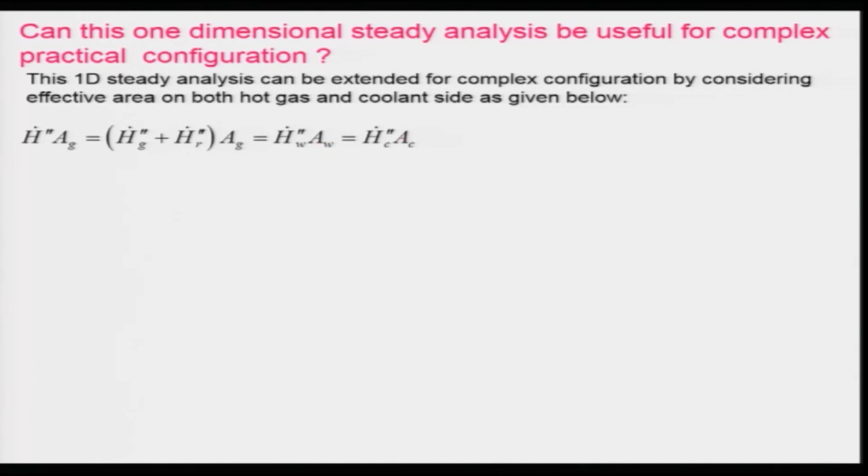So, what will we be considering? A g is the hot side area, and A w is the area of the wall. Of course, we will have to take the average area having certain thickness, and A c is your coolant area. So, A g is the hot gas side area, A w is the effective wall area, and A c is the effective coolant wall area, that we will have to consider.

And if we know this, then equation 8 becomes basically q dot double dash is equal to T wa minus T c plus q dot double dash R divided by h g, divided by the resistances. This is 1 by h g, delta L by k w into A g by A w, and A g divided by h c A c, and this we can call equation 9. And this you can derive yourself. I am just leaving it for you as an exercise.

In order to use this expression, we need to either know the heat flux, or we will have to know the other things on the right hand side. For example, T c we can sometimes fix for designing, and of course, the area has to be calculated, delta L can be chosen for design purposes, some thickness, or it is already designed. k w is the thermal conductivity of the wall, which we will have to find depending on its material. And h g and h c, the convective heat transfer coefficients, have to be known; then only you can find how much heat flux is passing through, or vice versa.

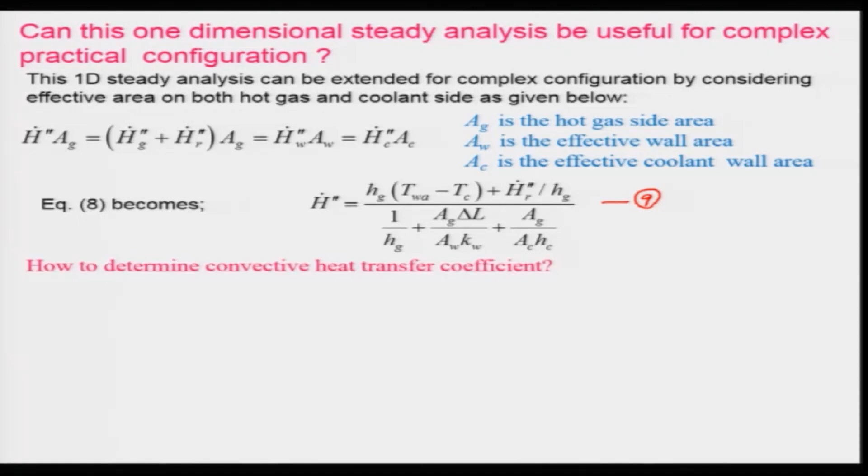If heat flux is known, then you can find what your T wa or T g will be, or something like that. So, therefore, the question arises how to determine the convective heat transfer coefficient.

For this, we will basically be using semi empirical expressions for Nusselt number, which people have already obtained by conducting experiments. However, if you want to do it analytically, you will have to solve all the governing equations for conjugate heat transfer and turbulent flow, or if you want to do it for one dimensional, of course one can do that, but you may not get a very accurate result.

Now, that can be done, as I told, by using semi empirical relations for convective heat transfer coefficients. And let us look at the heat transfer coefficient in terms of Nusselt number. This is your Nu g, the gas side Nusselt number.

Of gas, which is nothing but Hg dg divided by Kg, and Hg is your gas convective heat transfer coefficient, and dg is your diameter of the combustion chamber or the nozzle at any cross section on gas side, and this is your thermal conductivity.

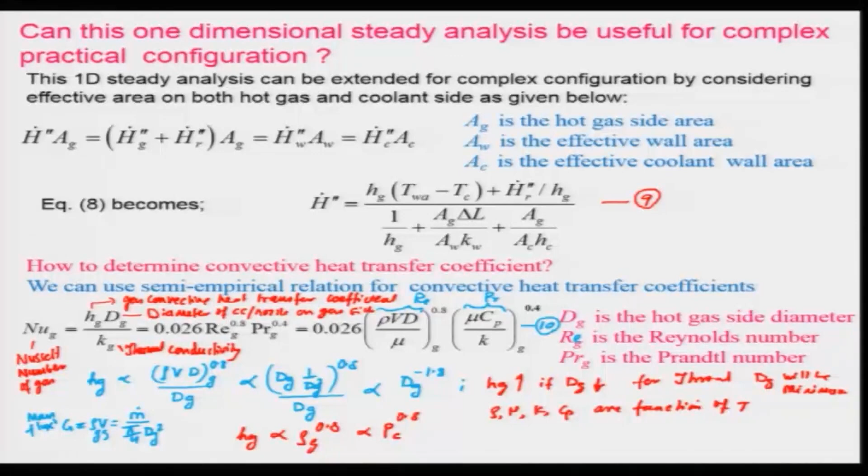Besides this, keep in mind that rho, mu, k, and also Cp are functions of temperature, and the temperature will be changing, particularly in the nozzle, to a large extent, from 3500 to maybe 800, 900 or 700 Kelvin. So, these properties will be changing. Now, the question arises where you will evaluate their values, and what is done is that they are evaluated at the film temperature Tf, and we will be using this formula, that is Tg plus Twh divided by 2.

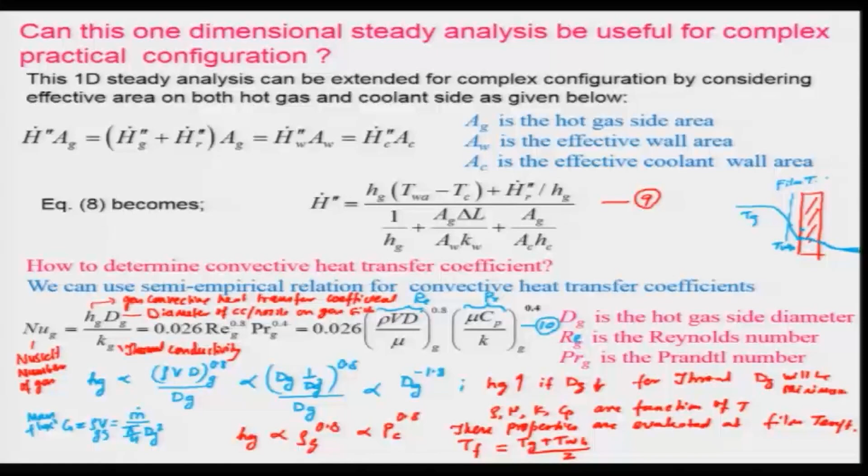So, this is your wall and this is your temperature. This temperature is Twh and this is your Tg. Now, there is a variation in the wall itself, and that is true also in case of your combustion chamber. So you take some average temperature here. This is your film temperature. One has to take care of it for evaluating the properties, so that you can get a proper estimation of the gas convective heat transfer coefficient.

So, let us look at a semi empirical relation for the convective heat transfer coefficient of the coolant, and it is similar to that. Nusselt number for coolant is equal to hc dc divided by Kc, which is nothing but 0.023 Reynolds number power to the 0.8 and Prandtl number power 0.33.

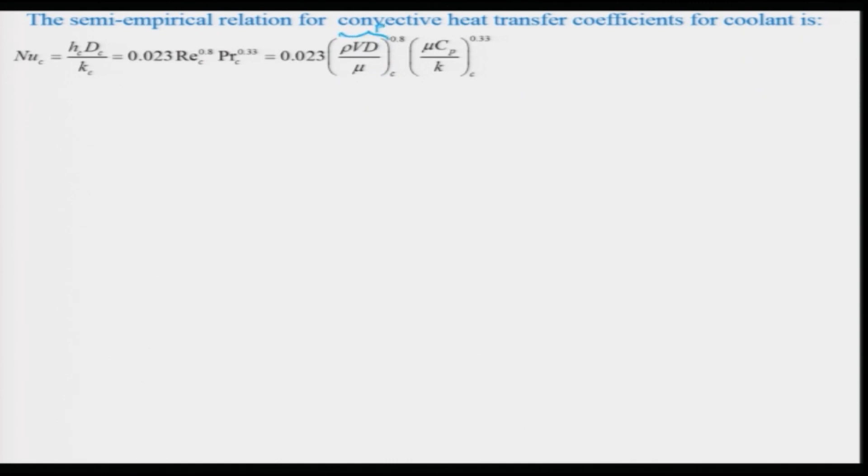If you look at this, the coefficient is a little different; otherwise the expression of the Nusselt number for both gas side convection and coolant side convection is almost similar, I can say. And this is the Reynolds number, right. These are expressed as Reynolds number, and this is your Prandtl number.

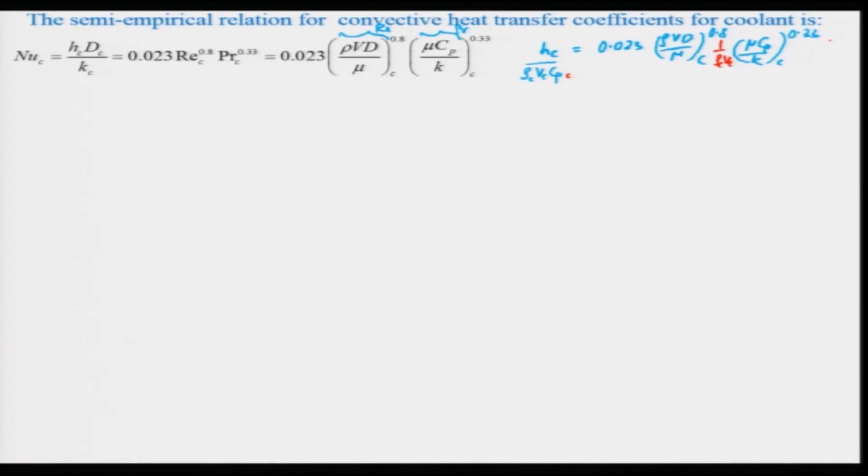And if I divide this by rho c V c C p c, dividing also the right hand side, I can say this is nothing but your rho c V c, and this is your 1 over C p c. And keep in mind that this is nothing but the thermal capacity of the coolant. You are considering this as a ratio of heat transfer coefficient of coolant divided by the thermal capacity of the coolant, and this term is known as Stanton number.

And this is a non-dimensional number which is used in heat transfer problems, particularly when the Reynolds analogy is valid. We can write down h c by rho c V c C p c is equal to, and I can take this rho c V c and mu also. If I consider 1 by mu to the 0.8, that is equal to mu to the 0.2 by mu, I can use that from here.

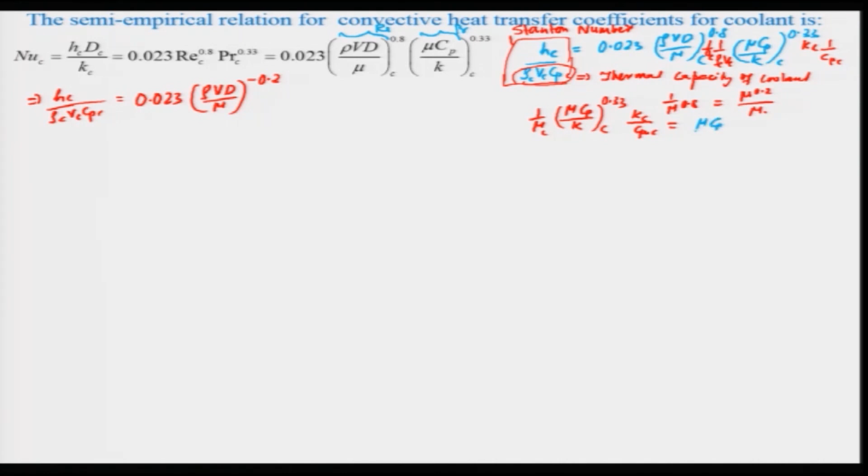So, that becomes 0.023 (rho v d by mu) to the power minus 0.2, and if you look at this mu C p and K c, K c in the denominator will basically be 0.67. So, all these things together, 1 over mu C p by K c to the 0.33, and you can see this is nothing but your (mu C p by K c) to the power minus 0.67, right.

So, let us look at what we can infer from this. To have a higher h c, what will I have to do? Basically, we will have to increase this rho c V c, and we can also increase C p c, which depends on the coolant itself. For example, hydrogen is preferred over the others because it has higher Cp values. So higher heat transfer coefficient for coolant, or even gas, can be achieved by increasing C p c for a fixed Reynolds number and Prandtl number.

Consider this is your throat area, and at the throat generally the heat flux will be very high, and in order to protect this material, heat has to be taken away by the coolant. For that we can increase this rho Vc for a particular coolant, and the density of the coolant cannot be changed.

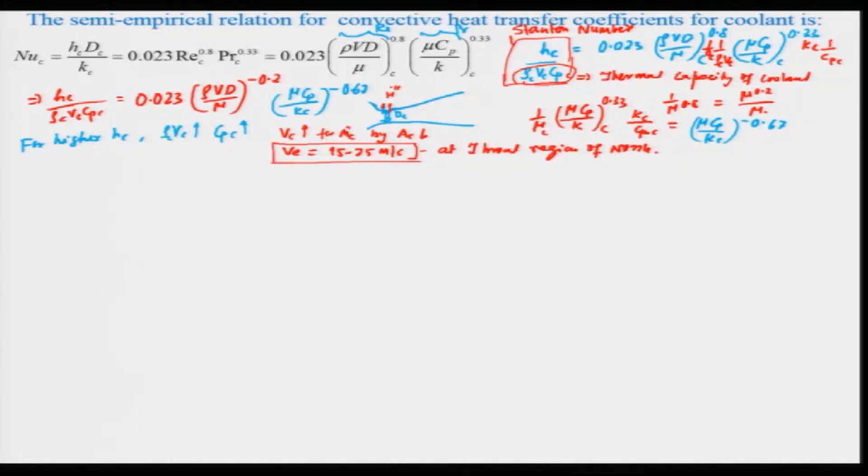and how we can really relate this adiabatic wall temperature to the recovery factor. And the recovery factor is really very important, provided the velocity is very high, particularly in the nozzle where the velocity will be supersonic. And this is your adiabatic wall temperature, when this heat flux, in the terminology I am using, is equal to 0 heat flux along the wall; then we will get T W.

However, is this T W A the same as T G or not? If you consider this is your total gas temperature, which is a little lower, because the velocity of the hot gas will be coming to 0 at the wall. As a result, there will be a certain increase in the static temperature due to the higher velocity gradient. And as T G is having higher values, this fluid will be at a lower temperature and there will be heat transfer, so there will be a little increase in the temperature.

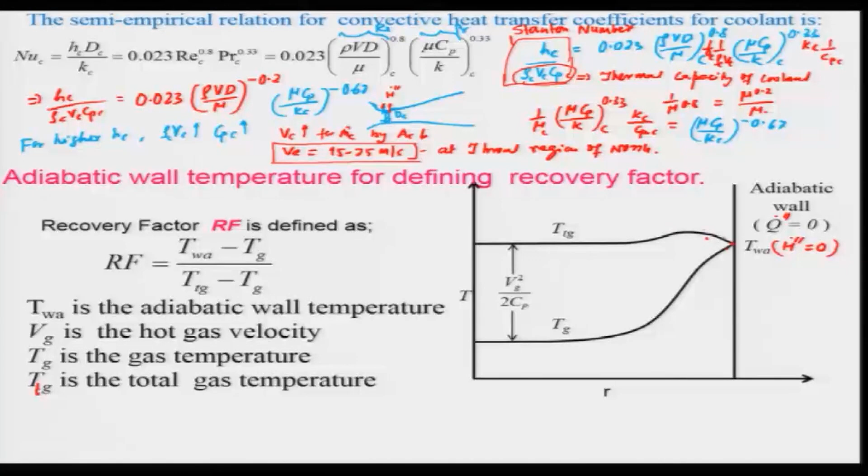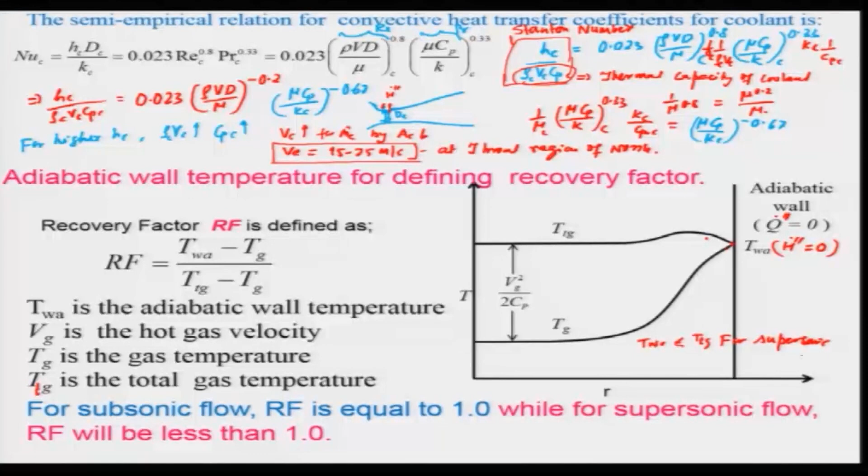For subsonic flow, RF is equal to 1, while for supersonic flow the recovery factor will be less than 1. As indicated in the figure, T W A is less than T T G, so it will be less than 1 for supersonic flow. And let us take an example to illustrate this point.

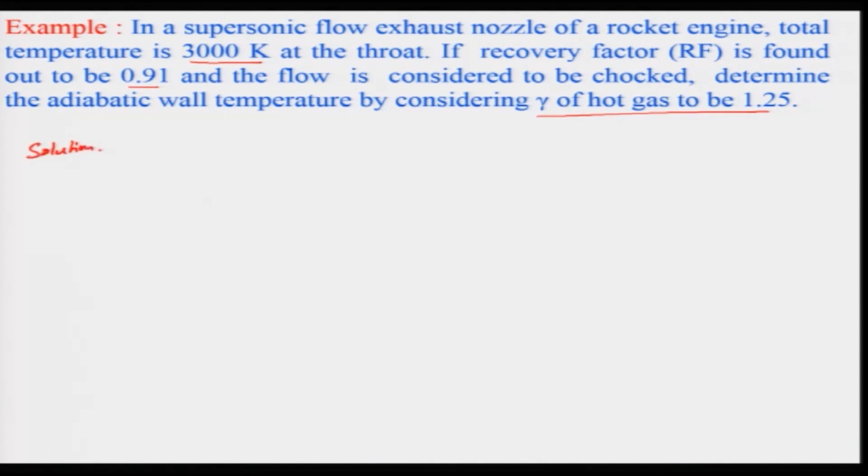In a supersonic exhaust nozzle of a rocket engine, the total temperature is 3000 Kelvin at the throat. If the recovery factor is found to be 0.91 and the flow is considered to be choked at the nozzle throat, determine the adiabatic wall temperature, considering gamma of the hot gas to be 1.25. So, we know the RF factor, and the total temperature T T G is given as 3000 Kelvin. T G is not known. But how will we get this T G?

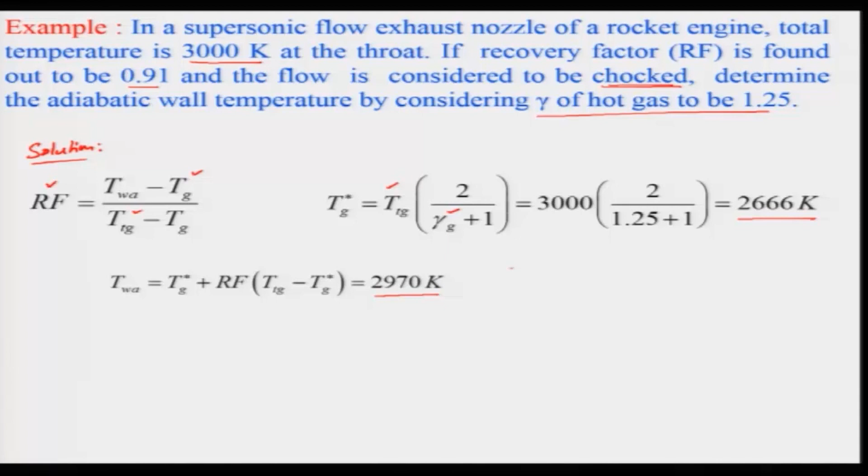We can get T G because the throat is choked, therefore we can use the choked condition, T G star is equal to T T G times 2 divided by gamma g plus 1; gamma and T T G are given. So, we get 2666 Kelvin, and now T G and RF are known. So, we find T W A is 2970 K, whereas T T G is 3000 Kelvin, which is very close; the difference is within 1%, which is within experimental error.

Therefore, we will always consider T W A approximately equal to T T G. Hence we can assume T W A equal to T T G at the throat of the nozzle for this problem, and for all cases we may consider it without incurring much error.